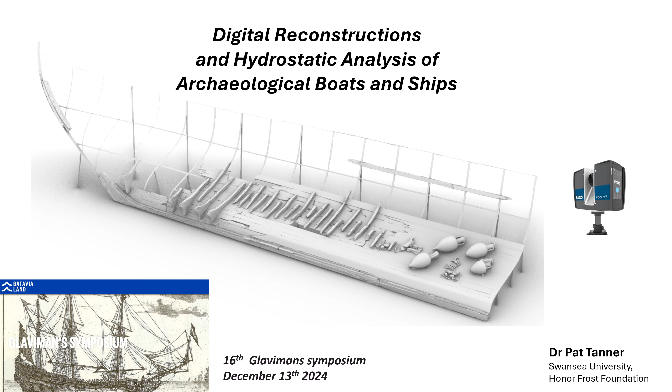Unfortunately, it's going to be all in English. Professor Van Hulk and Dr. Wouter Woedes tried to teach me some Dutch. Admittedly, there was some beer involved. I remembered 3 words, and the 3rd word I'm not allowed to use in public. So, safer we stay in English.

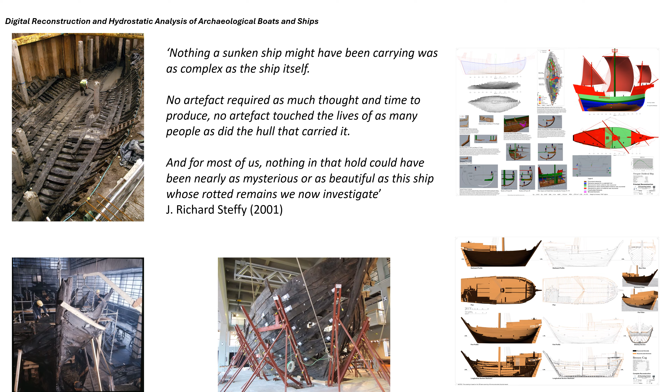Just a very quick quote there. Wouter had a slide a while ago that showed the book by Dick Steffy, who did an awful lot of reconstructions in America. And that comment there in the middle, I think, is quite relevant. The ships that we find, a lot of the shipwrecks, they're full of all sorts of artifacts, lovely cargo, sometimes gold coins. But for most of us here, it's actually the ship itself that's the most important thing. That ship took so much time and effort to build, so many people involved, and without the ship it can't transport the cargo. So it's the ship itself is what most of us are most interested in.

As Andre mentioned, I had a bit of a midlife crisis 15, 20 years ago and started becoming involved in maritime archaeology, signed up for a PhD in Southampton. And they got very excited because now they had a boat builder dragged into the world of academic research. What they asked me to do for my PhD was to look at all of the reconstructions that have been published, all the past work, and do a sort of review of what had been done - how good, how valid were the reconstructions. I could see straight away what they were interested in was my experience of boat building and sailing and looking at what had been done.

So I started thinking about the idea, how could we validate some of the research, because I understood very little Dutch, but I did get the reconstructie interpretatie. Every reconstruction that we do is an interpretation. We never find a full shipwreck, very, very rarely. So we're interpreting and trying to understand what was there and make a hypothetical reconstruction. It's quite important then, because I've seen some reconstructions, and the boat has to float. It has to function as a ship. That's its primary function. So how can we analyze and test that?

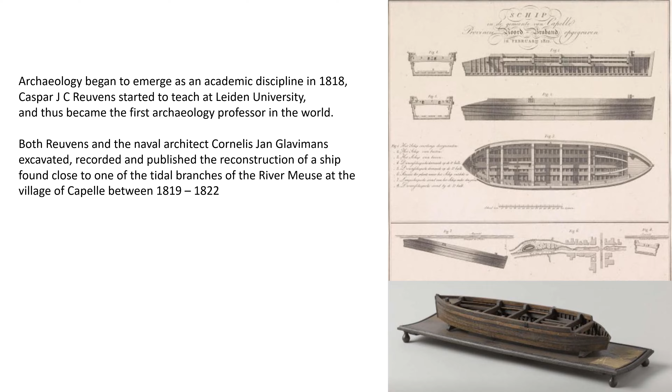Part of my research, I went right back to the beginning, and that's why I'm delighted to be here today. Reuvens and Glavimans, pretty much the very beginnings of maritime archaeology as a discipline. And I love that model that they made. They made 2 models. The first had no interpretation, just a model of what they found. So it's honest, it's true, that's what they found there. And then their second model was their interpretation. Because quite often with publications, you can't go back to the original data, the original information, and question and analyze what has been done in the reconstructions.

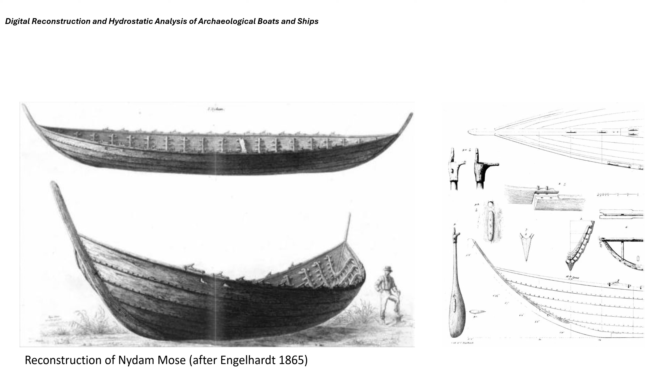Some other examples, Nydam Mose from 1865. A lot of the stuff being done at this period was sketches and artist impressions of what they thought the boats looked like. Another very good example, the Oseberg ship. It was discovered in 1904, excavated and put back on display in a museum. People then subsequently took measurements from that museum display and built a 1:1, what Wouter called a research model. They built a full-size replica of the ship, and on its very first voyage it sank, sailed itself under the bow wave. The reason why: they put the ship back together in the museum with slightly wrong angles on the bow and stern, which had squashed in, tightened the front of the ship. The minute they built the full-size replica the same as what was on display, the thing sank.

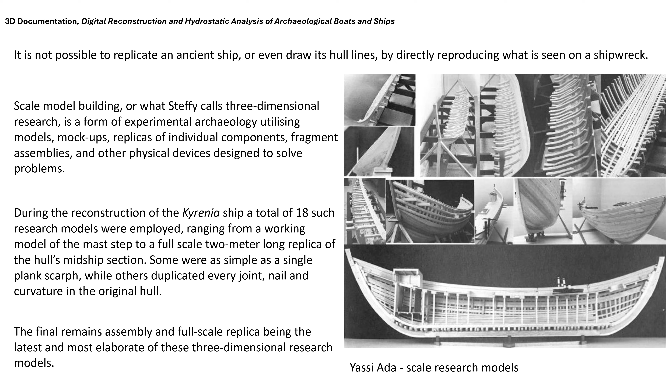Again, another quote from Dick Steffy. Anytime that Steffy worked on a research project, he built models, lots of models. Even models of little parts of the ship just to try and understand how the whole thing goes back together. For the Kyrenia and the Yassi Ada ships, he built over 18 research models before he finally arrived at a stage where he was confident to put the ship on display in the museum.

So as part of my PhD, I looked at all of the different, well, not all, but the majority of the different ships that had been excavated, published, and reconstructed. And I tried to understand how were people doing this process. How were they creating their hypothetical models, and what were they using to analyze and to say, yes, I've made the correct reconstruction. Quite often it's things like coefficients of form, or how much tonnage the boat can carry. We find documentary evidence somewhere that a cog carried 80 lasts.

We don't even know exactly how big a last is because it had different measurements in different harbours, not to mention different countries. We find dimensions written on drawings, 15 feet, 100 feet. Is it an Amsterdam foot? A Swedish foot? Or an Irishman's foot? So we've got these inconsistent things we're trying to work with.

So again, I go back to this idea of: can the ship float? Does it function as a boat? After that, then we can start to ask more questions of the ship.

So basically, my whole research was this idea of using the 3D digital technology we have available now, things like photogrammetry and laser scanning, recording the ship as a three-dimensional object, reconstructing it in 3 dimensions, and testing it in 3 dimensions. With 2-dimensional paper drawings, you're creating this super complex 3D shape, flattening it into a 2D drawing, and then making another 2D drawing. Very, very rarely do these two-dimensional drawings match up. If you put them all back together, you don't get back into a ship again. You'll see that in the slides.

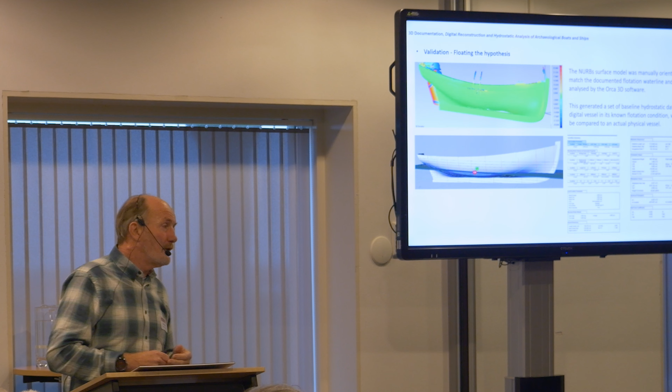So using the marked measurements from the boat we had built, we know exactly the weight, the size, the dimensions of the boat, and we have the mark where the water sits on it. We're able to put the computer model from the laser scan back exactly as it floats in the real world. The naval architecture software can give us all the calculations and numbers — what it weighs, how much it displaces, all the information based on how it's sitting there in the water.

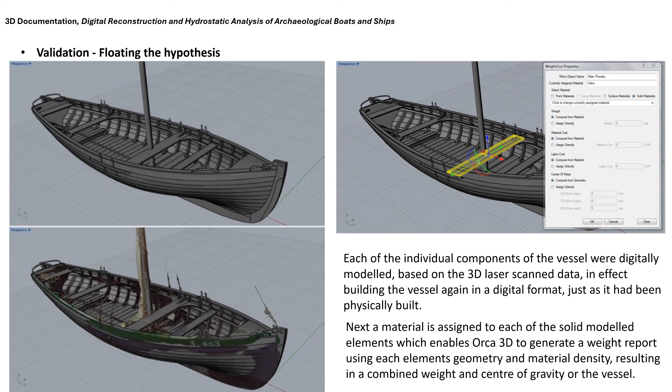Then I built a digital model of the same boat — rebuilt the ship again in the computer, every single timber as a solid object, telling the computer what the material is: oak for the beams, iron for the nails, canvas for the sails. We add in all the materials, and the computer then tells us what the digital model weighs.

Just the timber on its own there in the top left-hand corner, nothing else — that's how the boat would float according to the computer. On the bottom, if we start adding in things like the anchors, the life raft, all the extra bits of equipment actually in the boat, we get much closer to how the boat would sit.

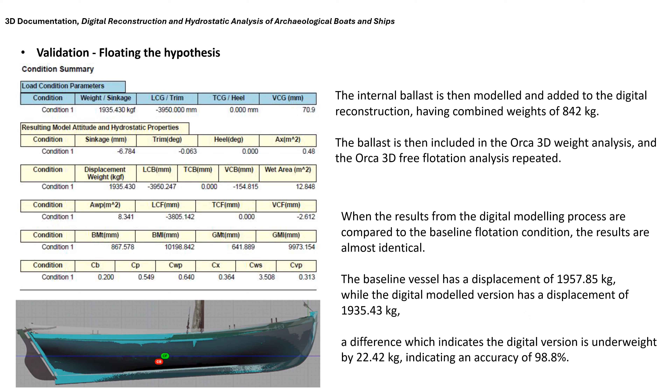After I finished my PhD, I was visiting the Bremen cog — I'm sure there isn't a person in the room who doesn't know the Bremen cog. A random question was asked at the time, and there was a lot of debate. This was back in 2020, maybe just before COVID. There are historical documents, written records, that the Hanseatic League traded with Iceland.

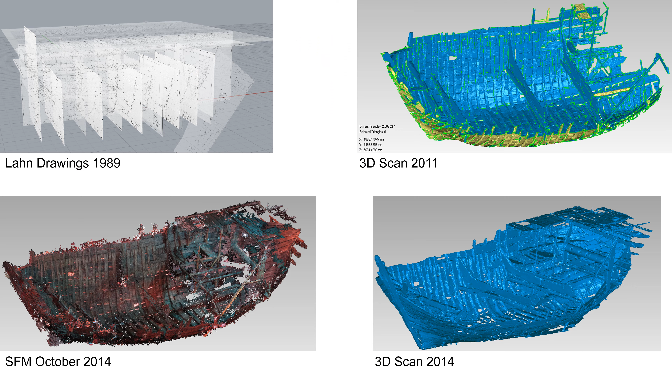So they have the Hanseatic cog, and some people started jumping to the conclusion that the Bremen cog is the sea-going ship of the Hanseatic League and it sailed to Iceland. I said, no, I don't think so. In fact, definitely no. So they asked me, could I prove it? Can I test and analyse how the ship would perform? I'm not sure if I could prove it, but as a boat builder and sailor, I wouldn't take this boat up to Iceland. So they gave me all of the data that they had.

We had the original two-dimensional paper drawings published by Werner Lahn, and we also had a series of digital data captures, either photogrammetry or laser scanning over a set period of time.

The first thing that gave us was a very interesting look at how the boat was behaving and changing in the museum during that 30-year period. From the time the ship went on display, as it shrunk and dried out and changed shape and deformed, we get this nice snapshot of a 30-year period where the ship is actually changing shape, shrinking and drying out and modifying itself. So that first question was, why is the ship moving so much?

So I was able to build a digital model of the ship, and as we know, ships are happier in water. They're definitely not happy in museums. Something the size of that Bremen cog floating on the water, every square centimetre of the surface area is being supported by the water. It's being cuddled and caressed by the water. By calculating the surface area, we know that on one single square centimetre, there's only 0.06 kilograms of force. It's sitting almost like on a feather bed.

If we look at what's inside the museum, because it's only sitting on the keel blocks and half a dozen steel supports, we have 5 to 10 times more pressure per square centimetre on the contact points of the ship in the museum. We're asking a ship that's almost now 1,000 years old to do 5 times more work than we asked it to do when it was built and launched and put afloat. So it's clearly not going to be happy there for any length of time longer.

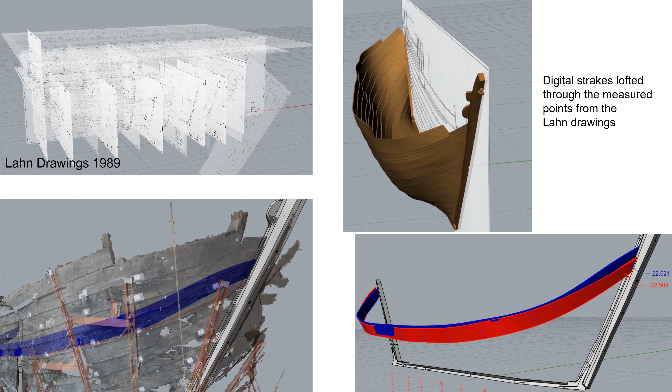So again, I went back to the original source data. Do you remember I mentioned that paper drawings don't make a ship? We take all of the paper drawings published by Werner Lahn, put them into their correct orientation, the body plans, the cross sections, and on the right is the shape of the ship if you join all the dots together. Clearly there's interpretations in the drawings. I don't know which ones he used to exactly create his ideal version, but clearly he's used some and not others, so we get this very distorted shape of the hull.

So we have to go back and try to understand which ones, trying to smooth out the differences. On the bottom was a simple drafting error in one of the drawings. That blue streak is the computer version of the paper drawing with the timber running along the side of the hull, and you can see it comes along and clearly jumps up. He skipped a dot in his counting when drawing the lines. Small, simple little errors, but they all add up.

And there was always this kind of funny discussion, an argument about the whole windlass in the back being tilted off to 2.5 degrees, which is then causing the deck to tilt off to 2.5 degrees, and also causing the whole stern castle to be angled backwards. A lot of the arguments, Lahn actually published pages about this. It clearly was stuck in his head for some reason.

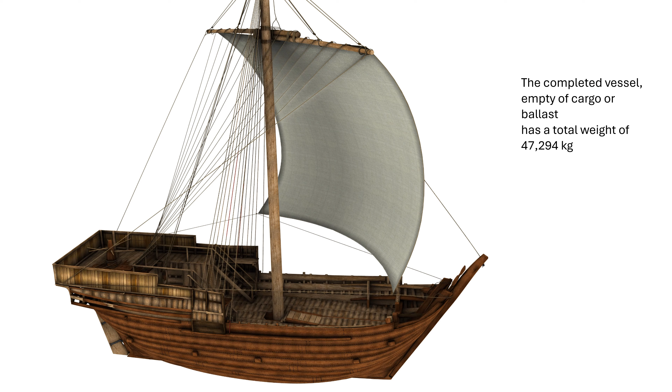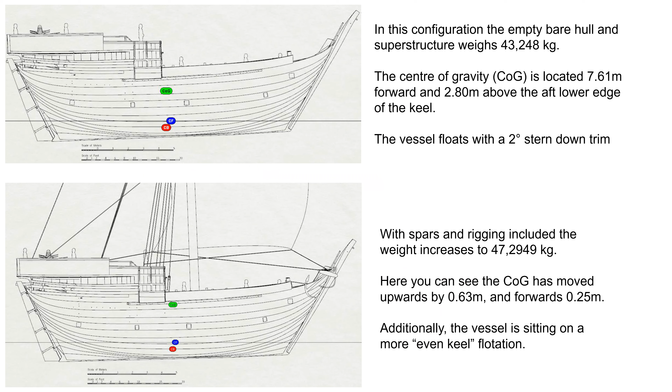So with the Bremen cog, as it sat there, we knew the weight exactly of all the timber, all the fastenings, all the nails. We started adding in things like the mast, the rigging and the sails, and we can calculate very, very accurately the weight of the ship as it sits. The problem with that is the empty ship without the rigging will float just about. Once we start adding in the weight of the mast, the sails and all the rigging, the ship becomes completely unstable.

With no ballast inside the ship, it doesn't have a stability curve - it's got a reverse stability curve. This thing is going to heel over. It might not capsize, it will go to a heel angle until it finds equilibrium, but if you sneeze, there's a chance that it might capsize. So possibly there's my version of a potential reason why the ship might have capsized during its building process. You definitely could not add the mast, the rigging and the sails without first putting stone ballast or some sort of weight into the ship.

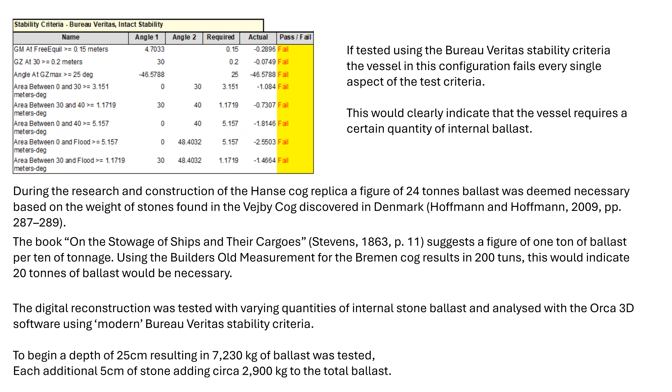Again, all this testing and digital analysis, we're able to analyze the results. So that empty ship there with no ballast in it, even if you did manage to keep it sort of upright, with crew running from side to side to stop it capsizing, it fails every single criteria for stability. Nobody would put any cargo or people on board, and you definitely wouldn't get any modern day insurance to go sailing on it. So that tells us straight away that the ship needed some sort of ballast to make it stable.

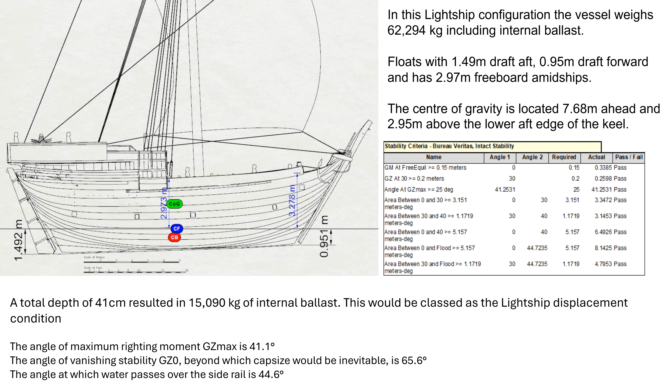During the original replicas and the original modelling of the various versions of the ship, they did some research at the university in Kiel, I believe, and they came up with figures of like 20 tons of stone and all sorts of strange numbers for maybe what's needed in the ship. The beauty with the naval architecture software is I can start gradually adding one single stone, or one centimetre of stone in the bottom, and test the program.

Is it stable? No, it's still capsized. Add another 5 centimeters, so I can incrementally start adding until we get to somewhere that the ship will just about function. Basically that's what we do: keep adding, retesting, adding and retesting.

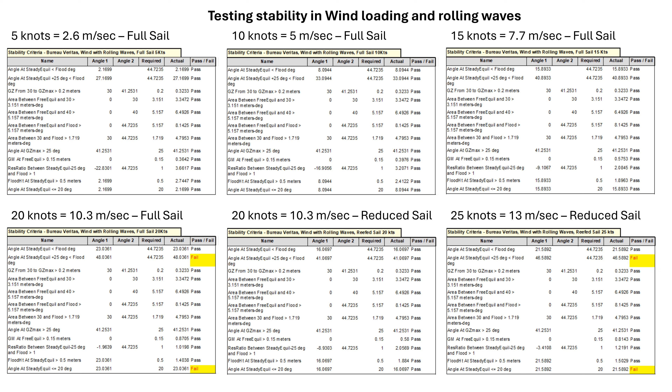We can also analyse the effect of the wind blowing on the side of the ship, how much it will heel over with different amounts of cargo, and keep running different tests until we find a set of numbers that say yes, this can function as a ship. So we're able to tell in low, medium, strong winds, full sail, reef down sail, or no sail at all, what way the ship is able to perform.

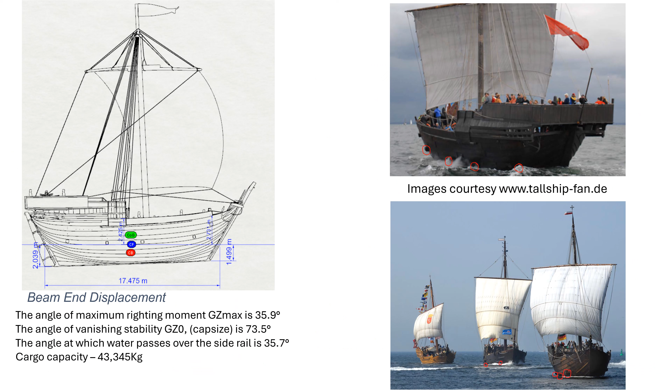One of the other things that always interested me is the through hull beams. All of the replicas that go sailing sail with those through hull beams above the water. But on nearly every cog that's found, they have these, what have been called quite often fender blocks, supposedly to protect the end of the beams when it's rubbing up against the stone pier. Strangely, all of those fender blocks are very well carved and shaped, teardrop shaped, pointed towards the ends. If you're only making a fender block that's protecting the end of your beam, all you need is a block of timber, because it's sacrificial.

But if you're making it all aerodynamic, hydrodynamic, teardrop shaped, my belief is that they were fairing the water running around the beams. If you set the Bremen cog with the through hull beams at or just above the water level, it carries a bit of cargo, but not an awful lot - about 40 tons. If you submerge the beams, the ship becomes an awful lot more stable and can carry nearly 3 times as much cargo. Everyone is saying that crazy Irishman wants to sink the Bremen cog, putting the through hull beams under the water. But if we look at the way they're made, there's an awful lot of work in them. They've carved rebates all around the beams, they've put caulking and moss, and there's an awful lot of work in trying to make those through hull beams watertight. And these fairing blocks that are put on either side of them, I'm quite happy with the idea that they probably were submerged. There's some examples there from the dual cog.

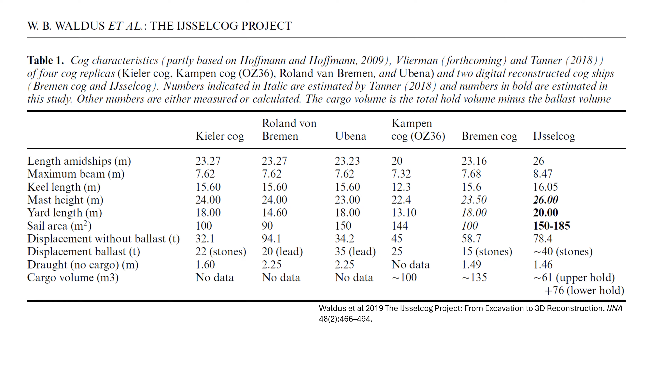Out in the North Atlantic with 15 to 20 meter waves, it does not work - it sinks very, very quickly. And we can do education and outreach things like augmented reality and VR headsets where you have the Bremen cog floating in the room in front of you. And that's it. Thank you very much.